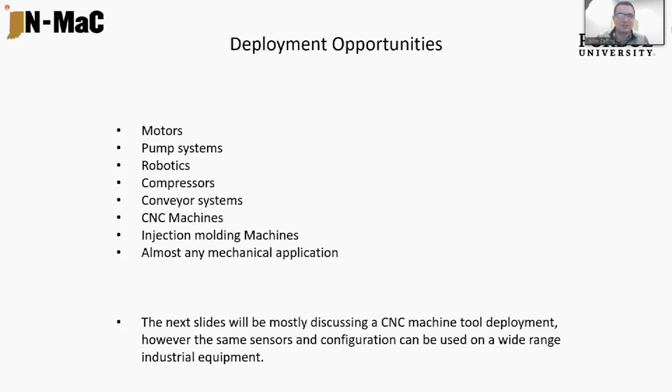Some of the deployment opportunities are on motors. That could be a motor running a pump, or a motor within a machine tool, multiple types of motors, electrical motors and whatnot, pump systems, robotics, compressors, conveyor systems, CNC machines, injection molding machines, or almost any mechanical application. The next slide will mostly be discussing CNC machine tool deployment. However, the same sensors and configuration can be used on a wide range of industrial equipment.

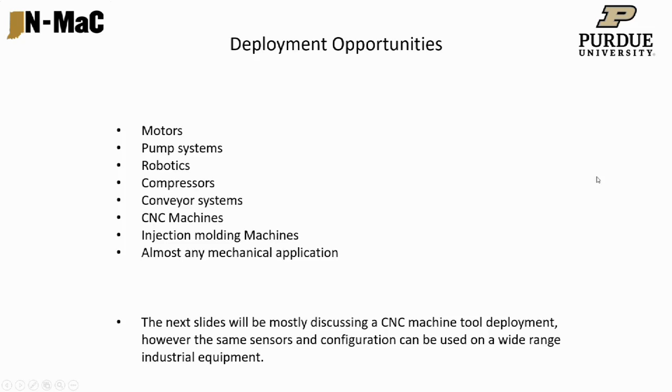Next slide. So there are a few different types of maintenance.

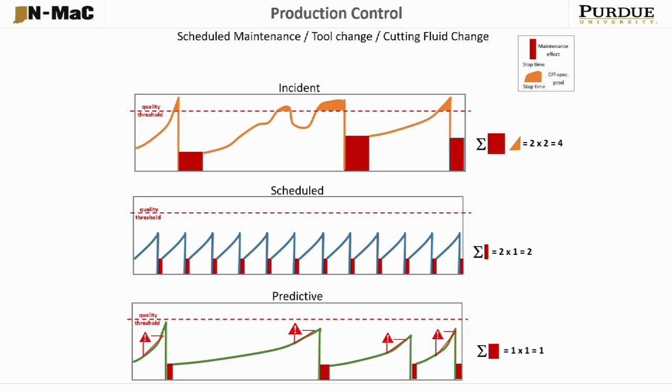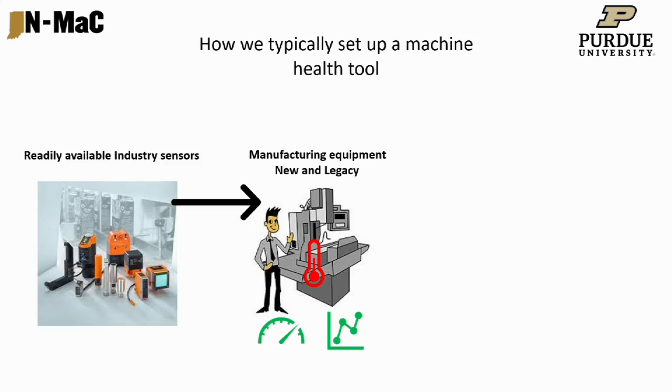So how we typically set up a machine health tool: we use readily available industry sensors. We're not making new sensors or anything like that, we're using sensors that are already out there in industry. You might already have some on your equipment. Then we attach these sensors to new and used equipment, so you don't necessarily need brand new equipment for IoT to work for you. We can put it on 1920 transfer lines, we can put it on presses. You can put these sensors on almost any type of equipment.

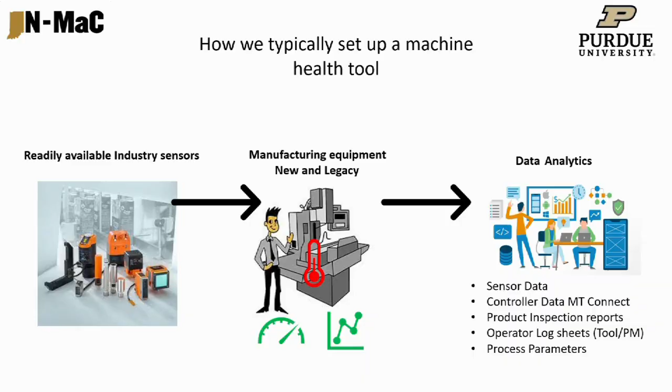This is where we really come into play with the data analytics. So we take that sensor data, the controller data if the machine has a controller, we'll establish a connection via MTConnect, product inspection reports, operator log sheets when they change the tool, when parts go out of quality. That way we can overlap what's happening at the machine with the sensor data to start to get those data sets for predictive modeling, also the process parameters.

For instance, the coolant concentration in machine shops is something that unfortunately a lot of the time is neglected. It's a necessary evil, and I've worked for companies where the coolant starts to go bad and they pour bleach in it. That plays even more havoc on seals and bearings and things like that in your machine, let alone your part quality. So a lot of this can seem overwhelming.

There's sensors everywhere, but when we first started this, we put probably 40 sensors on one piece of equipment. Over time we've learned what's necessary, if we monitor before or after, what actual data do we need and what is useful.

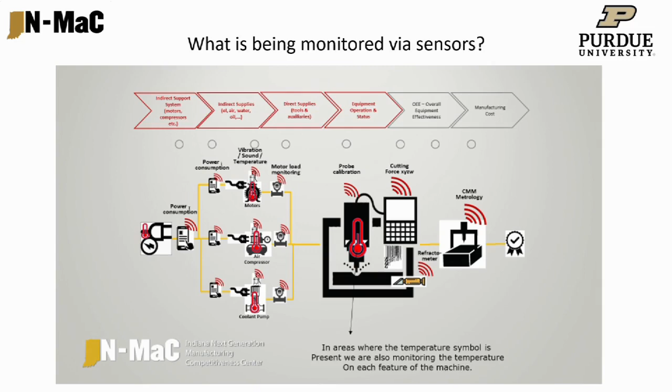It's not necessarily just for maintenance either. Maybe that operator has to go to the other end of the plant for a quality check or for a specific piece of tool, but they can look at this dashboard and see trends, see that, hey, this machine sits every other hour for 15 minutes. And they might be able to track down that the employee has to actually go to the other end of the plant for a quality check. So it can help in a lot of different ways.

Machine monitoring allows you to evaluate your machine and factory production both on a micro and macro scale, where you decide what data is important to you today. Some companies look at it and think there's a lot of data analytics - we're not really into that. But on a smaller scale, just the dashboard can be very helpful for companies to know exactly where they're losing time and money on specific equipment, or they might be able to just take a look at it and say, hey, these numbers don't quite look right - that graph is spiking, the spindle vibration, or the pump's starting to get extra vibration - and then they can start to look into it further.

Other engineers and managers want data logs, though. With data logs, machine analytics can come into play for detection in part quality or machine process errors or anomalies. How this is done can be reviewed on the next slide.

So some common barriers for IoT adoption with small and medium manufacturers are new and old equipment. Some companies have new equipment and old equipment. It's not an issue, we can help with some type of solution with either or. Some companies say, I don't make the same part over and over, I'm a job shop, I might be cutting aluminum today, titanium the next day, I might be making 40 different parts or products in a week. It's not an issue, there are solutions for that.

Then there are others, they're a production shop, they run the same thing over and over. That's not an issue either, it actually makes it a little easier, but it's not a problem. You don't have people on site that can do the data analytics? It's not an issue, that's what we're here to help you with. Are you worried about cost? We're willing to work with you on a free trial prior to you investing in sensors and personnel.

So companies that have single part production, they're mass producing something, making the same thing over and over. How we would typically set that up is mount sensors. The sensors would be mounted on key parts of the equipment: motors, bearings, ball screws, pumps, etc. Then if there's a control available, we'll establish a connection with MT Connect to pull data off that equipment, whether it's a part counter, what tool has happened, what program is up.

This is when the part quality goes out of spec. Then also the inspection reports, operator random inspection, and any final inspection documents should be kept. That way we can overlay that with the data also. Over time, we could possibly even get to the point where we have these data sets that we know whether that product should be a quality part before it ever leaves the piece of equipment, before it ever makes it to a quality check.

Then there's other companies, job shop, custom manufacturing, where they're making 40 different things a week. It's never the same thing over and over. So you can't get that baseline of a normal cycle because you're making multiple different types of parts, materials, tools, that sort of thing. But a lot of it's the same: we still mount the sensors on key parts of the equipment, the motors, bearings, ball screws, pumps, things of that nature. The control is the same. If there's a control available, we establish a connection with the MT Connect.

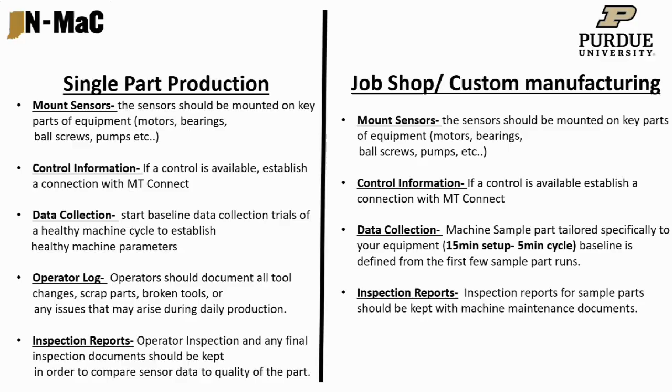Then data collection, it's a little different. So in a machine type environment, we tailor a part specifically to your equipment, maybe even your tooling. So we'll help you design a part that's maybe 2 or 3 tools, a 15-minute setup, a 5-minute cycle that we can run. So we know today your machine's healthy. We run this, then over months, weeks, days, you can set up and run this. It takes 20 minutes to set up and maybe run this part.

You can start to overlap that data. So if somebody has wrecked a machine, you can go back and run this part and see where it's affected. A lot of companies use a Renishaw ball bar in a CNC machine to check quality. This is kind of early detection, where you overlap that data over time and start to know there's extra vibration in a motor, or it's making a funny ticking sound. Then you can overlap that data, see the trends, and try to be prepared for downtime. Inspection reports for sample parts should be kept with machine maintenance documents also, so not only does this part meet this realm of sensor data, but what was the quality of the part also, because that's obviously very important.

A story I like to tell here: I worked at a company and we had new employees who'd been training with an operator for a while, and we thought he was ready to take over a specific piece of equipment. Some time went by and I could hear a loud sound coming from his machine. I went down there and he had a part with a fuzzy surface finish, and the part was black. I asked him, have you changed any inserts recently? He said no, it's still cutting good. I said, well, have you done any quality checks? He said no, the guy that trained me told me this is a pretty open tolerance part, I don't need to check it.

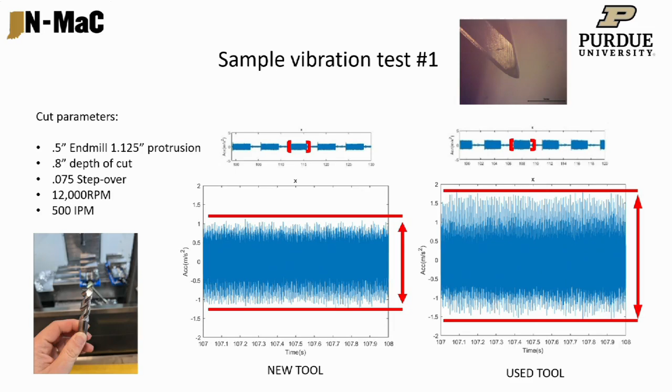Well, obviously it was somewhat faulty training, but on the other hand, it was still his responsibility. So I stopped the machine, opened it up, and he didn't even have an insert in the holder anymore. He was cutting with the seat of the tool holder. It was pretty close to being a catastrophic failure. But a tool like this, where we can see that vibration and correlate it with the sound and the issues, can detect that a tool broke or is wearing. It can also be used as an operator training device, where if they have that dashboard and an alarm pops up for excess vibration in the cutting tool, they can start to correlate what they heard in the background, the noise the machine was making, to what's happening. It can be used as a training tool for your operators as well.

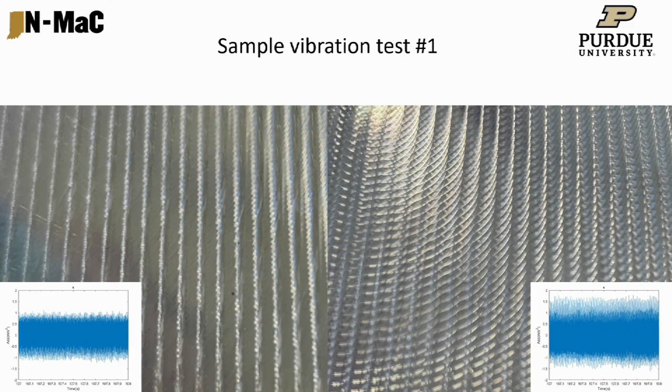Here are the results of the sample vibration test. This is the new tool, somewhat nice finish. And this is the used tool. Some people who might not know might think they look the same, but on the right-hand side, the tool's more or less shearing the material, it's not really cutting anymore. The tool's jumping, skipping, so to speak.

The surface finish on the left was an RA of 0.447, then on the right 3.188. And this tool was not crazy worn. This is something that maybe not a novice, but a medium type operator would still be trying to operate. They might not know how bad of an issue it is, but over time, if you let it go, it's going to eventually create a bad part. The surface finish or tolerancing is going to go out.

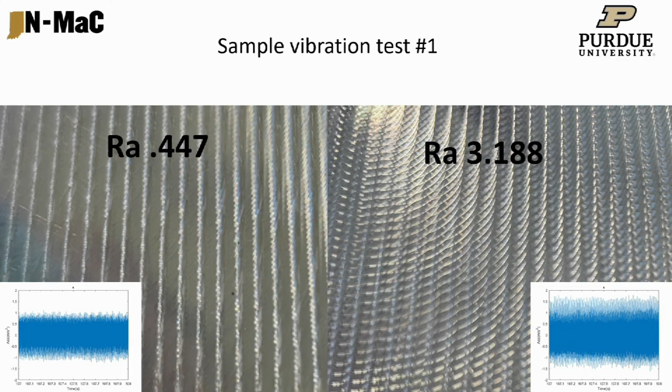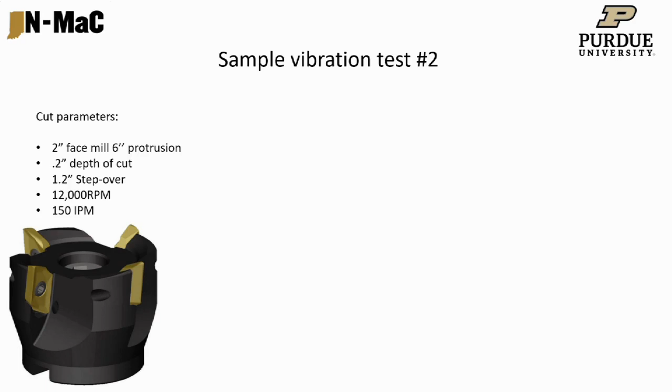So this is sample vibration test 2. It was a 2-inch face mill with 6 inches protruded, 0.2-inch depth of cut, 1.2-inch step over at 12,000 RPM and 150 inches a minute.

Once again, you can see the new tool versus the used tool, the meters per second squared almost doubles. With the new tool, it's in that 7.5 to negative 7.5 range. On the other one, it's 13 to negative 10 range. So this tool also was not worn hardly at all, even less so than the one before.

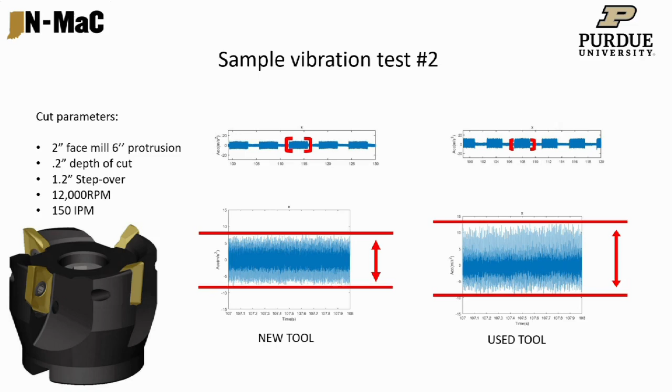There were no chips in the insert. So even a seasoned operator might reach in there, feel the insert, feel the cutting tool, know there's no chip in the insert, and think it's fine. But it's actually creating almost twice the vibration on the spindle, which in return is going to cause premature wear also.

So you might be thinking, that's a lot of sensors on a lot of different areas on equipment that doesn't really pertain to me. It's too much, we can't do it all at once. So it's not a system where you have to put 100 sensors on your machine. If you have a specific issue, you're having trouble with one specific piece of equipment, we can try to figure out a custom solution for it.

So for one instance, we worked with C&D Technologies. They had a lead molding machine. The issue was lead would splash out of the mold onto the hydraulic hoses and lead to hose failure. Their first solution was to add a splash guard around the mold, however, lead still would find its way around. It's a pretty nasty environment and still gets to the hose, leading to downtime.

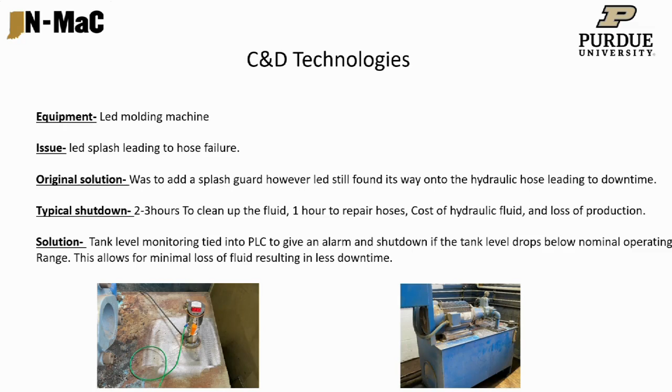So a typical shutdown, maybe 2 to 3 hours to clean up the fluid, an hour to repair hoses, plus the cost of hydraulic fluid and the loss of production. So our solution was to attach a tank level monitoring sensor tied to the PLC, which would give an alarm and shut down if the tank level drops at a fast rate below nominal operating range. This would allow for minimal loss of the fluid and less downtime. Yes, you're still going to have to fix the hose and things like that, but it's not as big of a mess.

Because this isn't an area where there's slow wear over time, it all goes from optimal range to a hole in a hose and fluid going everywhere. So the quicker you can shut it down, it minimizes the time that you're non-operational.

So currently we're running an N-MaC Purdue IoT sensor project. If you're interested in anything we spoke about, or would like us to take a look at a specific scenario in your company, we are currently seeking out industry partners for testing sites, based specifically around CNC machine tools and other mechanical applications. What's needed? We just need access to that equipment, network, your operator logs, and quality checks.

Cost: currently we're providing these services for one piece of equipment at no cost. At the end of the test, 3 to 6 months, if your facility would like to keep the sensors, they can purchase them from N-MaC at cost. At this point, N-MaC and Purdue would like to help your company implement the solution throughout the entire company if you see the added benefit. If you're interested in joining, please contact me at the contact information below.